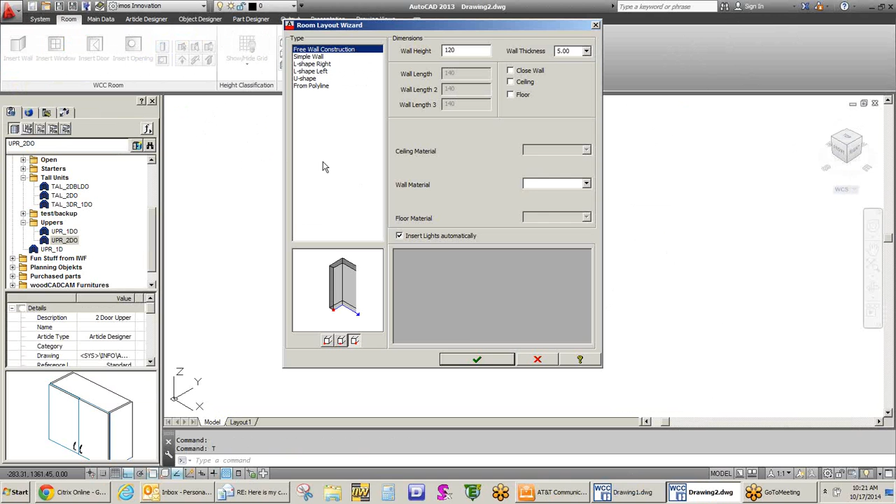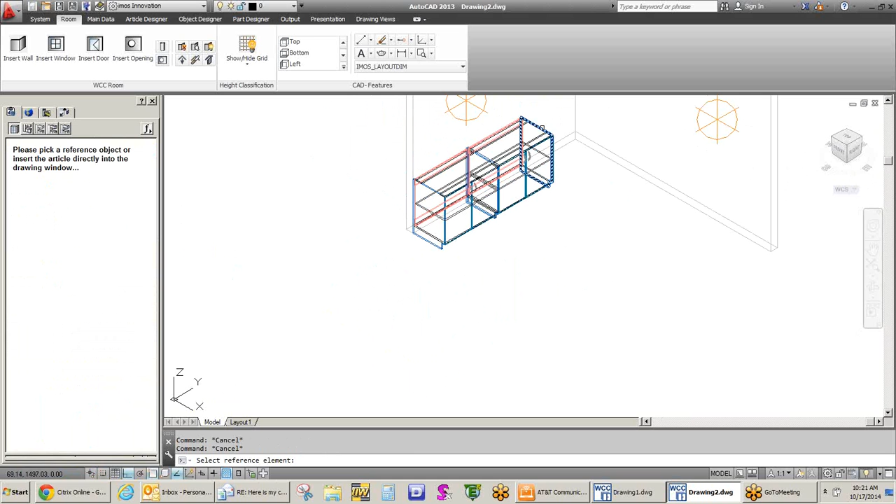So I'm just going to select, and type in whatever wall kind of stuff I want. I'll take this and select that I want to be able to place objects within the walls we've created. I'll do that a little faster than before, and throw in a tall cabinet, and let's throw in an upper as well. So real quickly, you're able to place objects from the library, controlling height, width, depth, all those kinds of things.

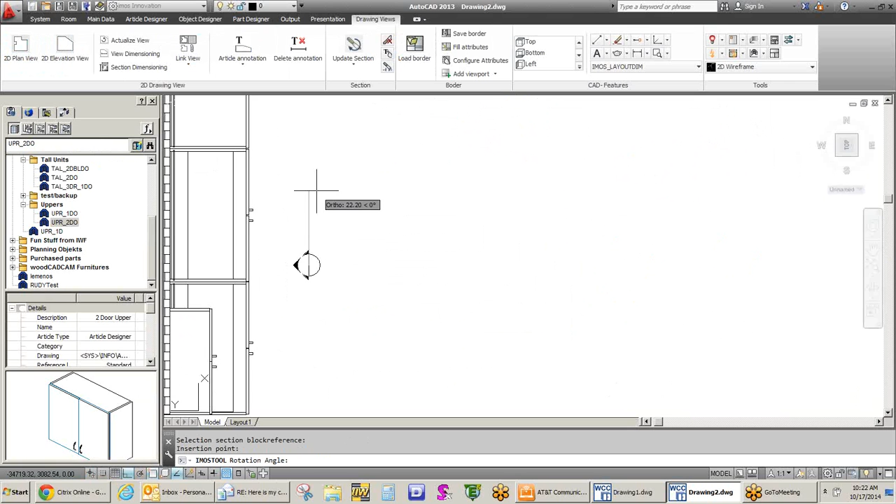Once we have that room layout done, we're literally able to utilize the tools for submittal purposes that automate AutoCAD, so we can get plans, elevations, details, and other things we might want. I'll label this as well, and tell it we want to create sectional information. I'll slice this from here to here, and we'll look at it from this side. I'll label this A, and now we have sections. Let's update this section and include the 3D wall elements of this. So now we have that within our sections as well.

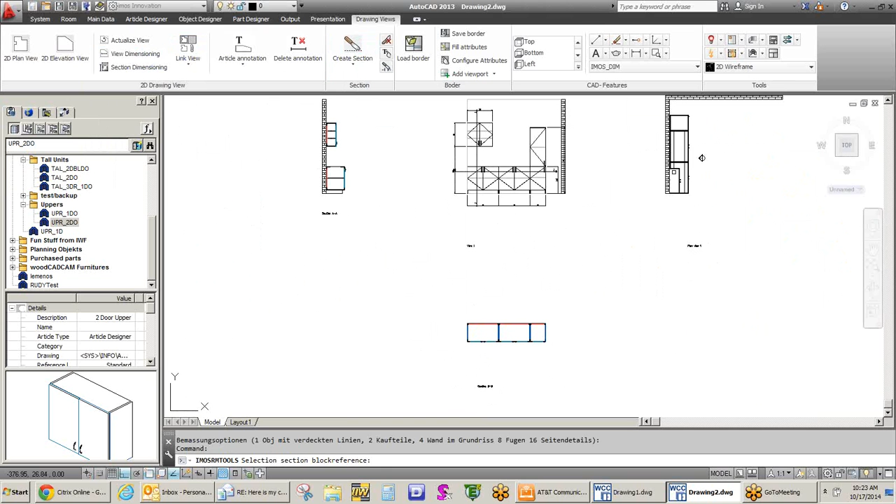Maybe we even want to create plan sections from this, so I'll slice across here looking at it from above. I'll label that B, and we'll place and label it. Maybe we want to automate dimensioning across this as well, even within our sections. Maybe we want to annotate articles and define what the product numbers and those kinds of things would be.

I'll tell this to add the position numbers in. Maybe I want to even annotate, in this case throw in and tell it what my adjustable shelves and these kinds of things might be. And so that's done as well.

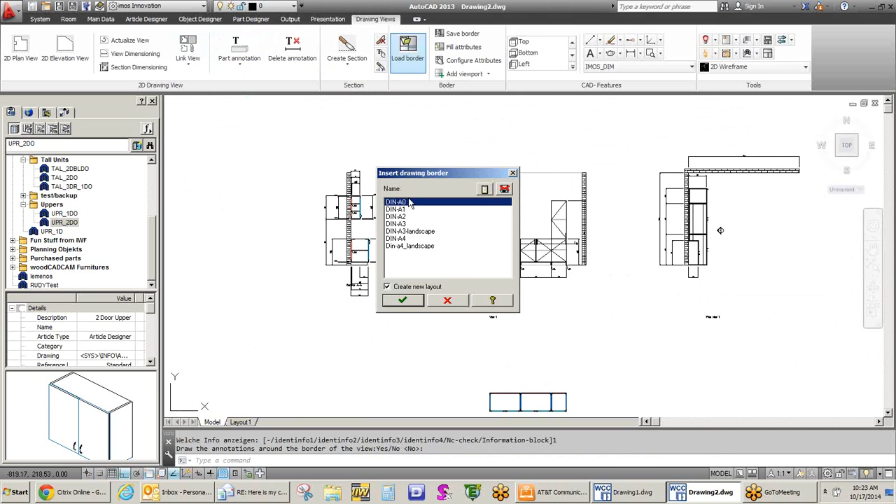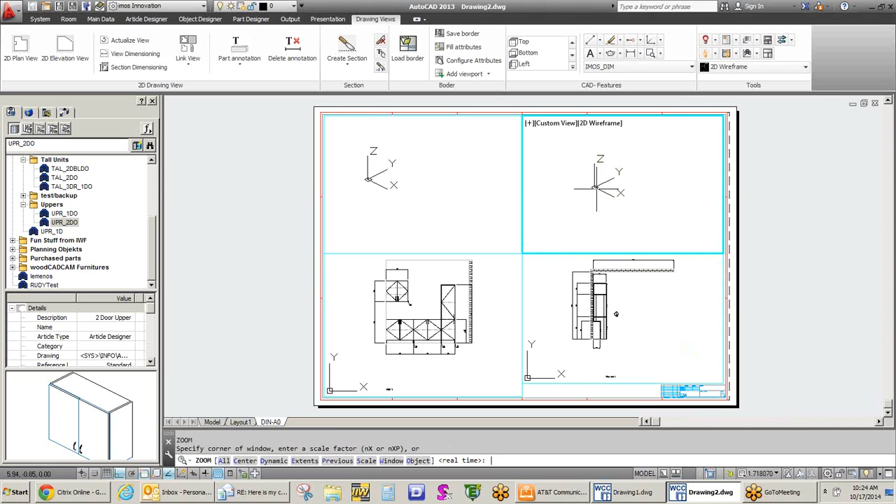So the next stage would be to quickly utilize tools to load borders and those kinds of things, so I could work within any viewports we might have and link the views. We'll say we want to throw an elevation here. I'll tell this what I want, and maybe link this view so we can have the plan view. In this case, maybe I want just the 3D, and change the visual styles or performance within that.

So of course that could be done. In this case, I'll just tell this that I want it to be shaded or realistic, whatever you want to work with. And again, maybe we want to come into this and have some kind of sectional drawings. So the point is that you can work in 3D AutoCAD, get all the visuals, and it will automatically automate the processes for being able to get the 2D shop drawings and architectural submittal style stuff done as well.

Does that make sense? Yeah. Yep. I'm sorry, I didn't hear anything from you guys' end. Yeah, yep, that makes sense. They said yes, it makes sense.

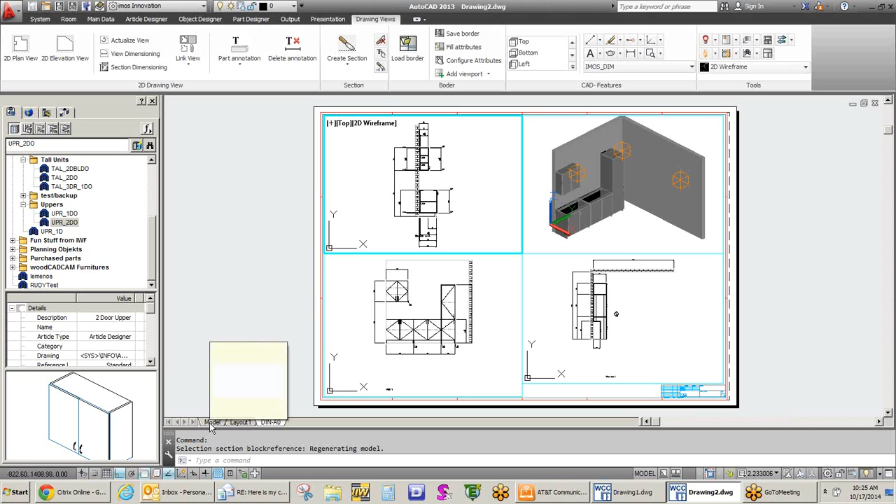Super, awesome. That's just a real quick understanding of being able to lay out walls, place products, whether they came from the library or new creations, whatever it is, and to begin to automate the process of being able to get drawings and stuff out of it.

Where I really wanted to go with you guys is the understanding that we might need to be able to create some custom things. So I'd like to start out kind of basic and then move into a little bit more custom things as we move along. Sometimes we're going to have situations where we need to be able to create something completely from scratch.

I think of this working much like you would in the world of modeling. Here I just have a cube I'm going to work with. I'll define a height, in this case a width, and in this case a depth. Let's take a number like 23.5, something like that. So now what I have is basically a cube that I'm going to work from.

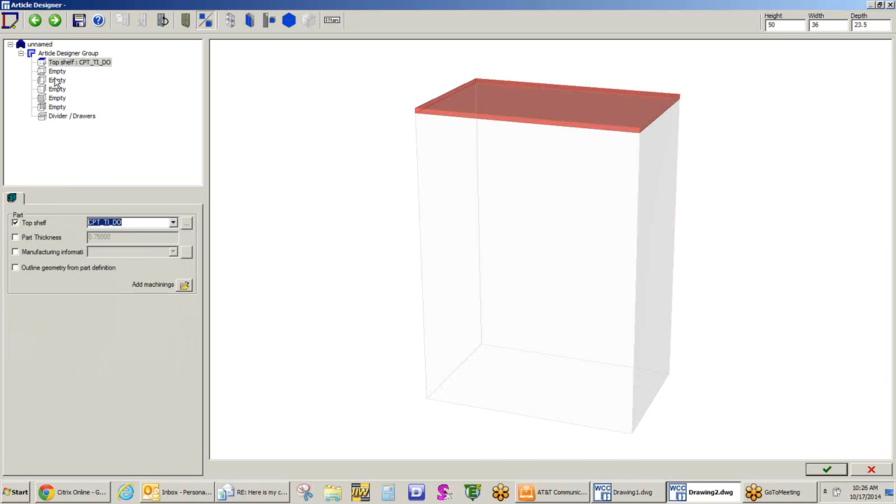If you'll notice on the left-hand side, it's the article designer group, and you'll notice it has all of these faces. I want to be able to apply things to these faces for a moment. In this case, I've got different types of tops and stuff that I might want to be working with. I'll tell this that I want a bottom, a left, or right. I'll leave the front empty, and I'll apply it to the back.

Now I want to be able to divide this thing the way that I might want. In this case, I'm going to tell it that I want to define it with fixed shelves and how I might want to deal with that. Notice if I use something as simple as 1:1, it tells it that it wants to be centered within the object, no matter how the height or whatever changes, so it becomes easy to do that. Or I could define it in a specific way.

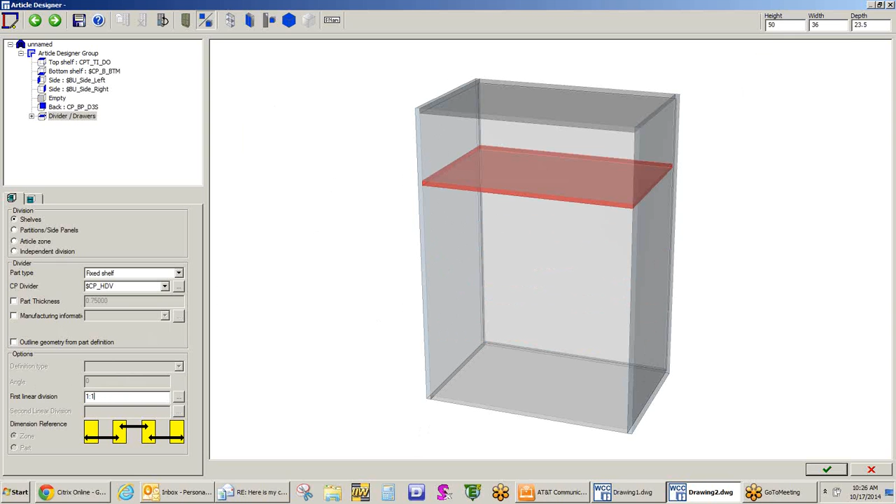In this case, I told it to be 6 to 12 inches from the bottom, so all the growth and stuff would occur above it. Or, of course, in reverse, I can work with it so it'd be fixed from the top. In this case, I'm going to just say I want to make this 1:1:1, and tell it that I want these to be equal no matter how it grows and works.

I can now work visually within this simply by clicking in an area. And in this case, let's just tell this that it's going to have some kind of sock drawers or whatever display kind of things that we might want within it.

I'll come into the next section and tell this that we want to divide this horizontally, so I'll tell it that I want to put a partition. I'll use that number now and tell it that I want it to be 12IN:1. I could click into this and use all of the faces that are created from these, telling this that I want maybe a left-hand swing on the door for this.

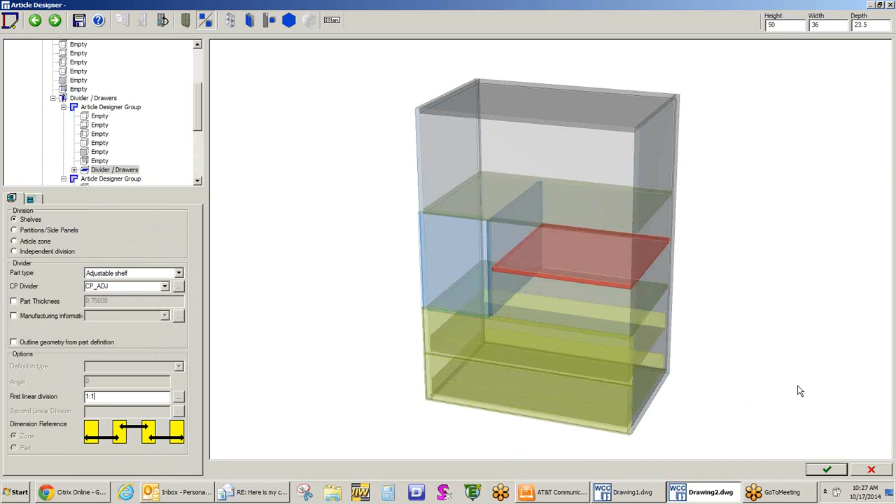I'll come into this area, tell it that I want to be able to have adjustable shelves into this, and I'll just tell it that I need one of them. Anyway, that's nothing real special, but just to see from absolutely nothing how you can build something.

What you might not know is that if I click yes to this, it could be saved back to my library, pick a category, give it a name, give it a description, and it's automatically available in the library. If I say no to this, it's available for me to create right within this project. And so if we look at this, we'll see that we have available.

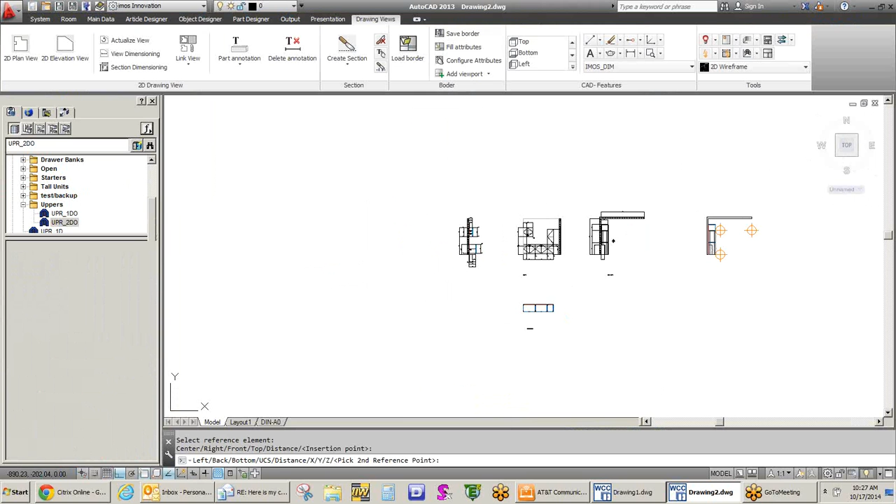I'm going to show you the way you might want to look at this information, and you'll see that all of the machining data and everything is completely available for you to view, including hardware and all that kind of stuff.

What you might also not know is that I designed this product literally while we were doing this, so that it was fully parametric. So, for example, if I said I want this to be 42 inches wide, that's what it's going to do.

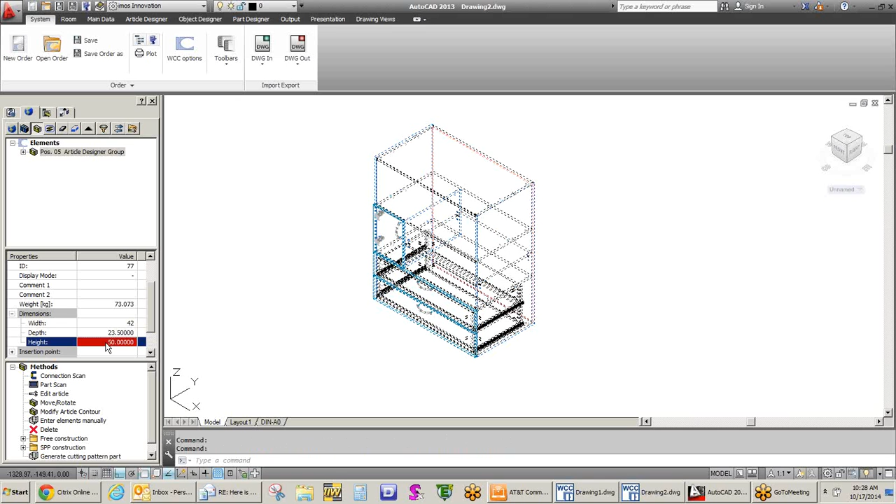This would probably be an easier visual one for you. If I came into this and said I want this to be 72 1/4, that is already done as well. I realize a lot of times you guys are dealing with unique as-built room conditions, so being able to have something you've engineered change in shape and size dynamically on the fly without a lot of work would be really important. Does that make sense?

I apologize if you guys are commenting or anything, I'm not hearing any of that.

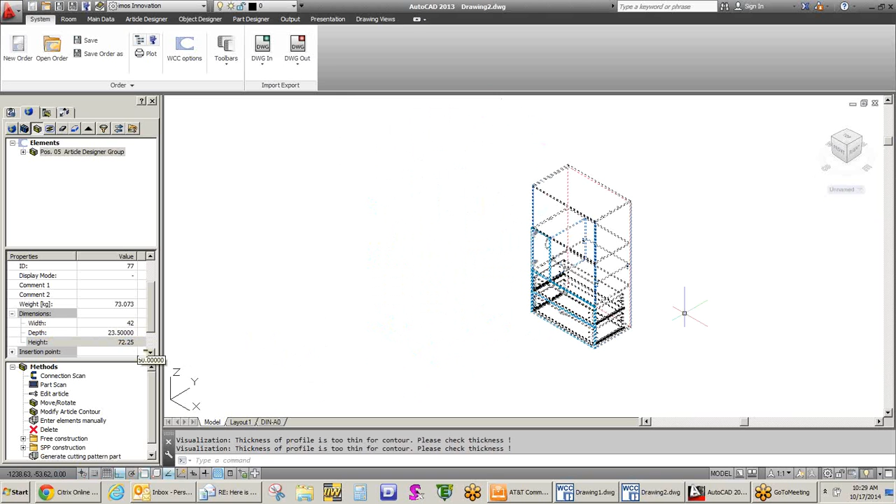Very, very good. Let's go a little bit further into this, understanding that while sometimes we deal with parts and pieces and sub-assemblies, often we might need to get into things that are a little bit more complex than simple boxes.

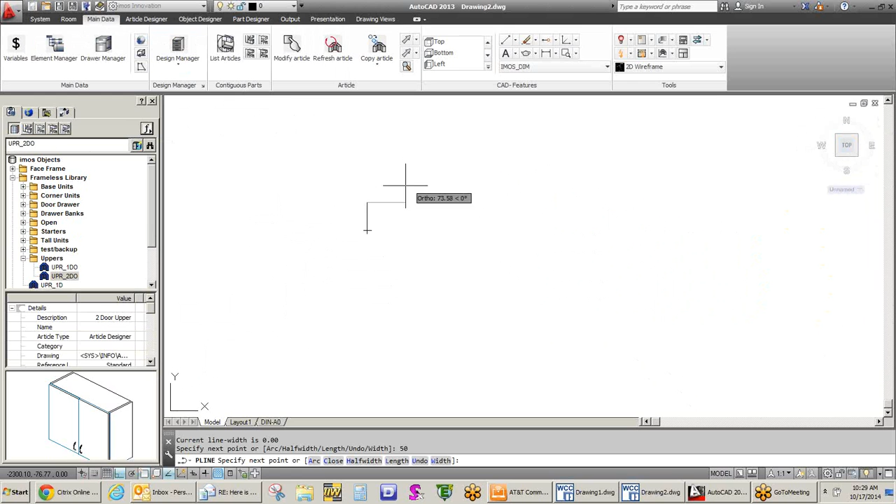So the next side of this I would think about getting into would be to work freehand in AutoCAD for a moment. I want to make something, let's call this 50 up that I want to work in. Let's come over here at like 18 inches, zip down at some specific angle, go into ortho mode, and get the polar tracking working. I want to turn this.

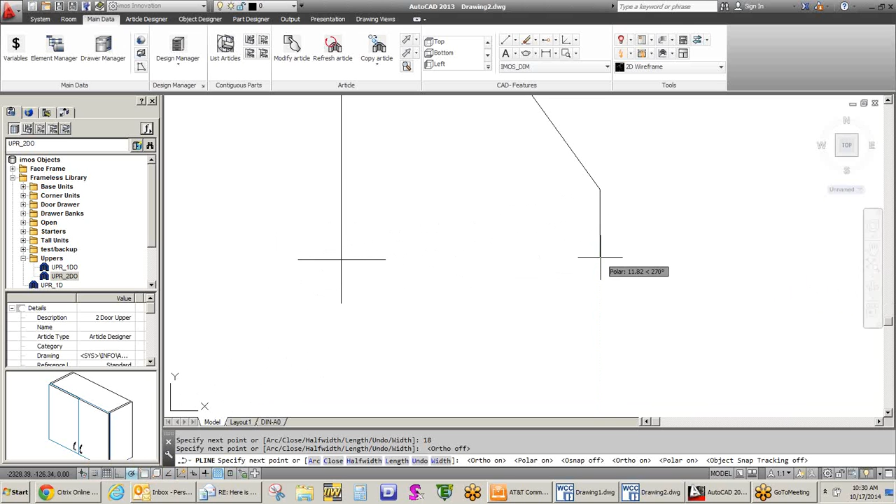Sorry, just a quick AutoCAD thing here. Come on, polar tracking, what are you not doing? Ortho, polar tracking, snap. Oh, I'm not sure what that is. I'll make this in a little bit different way since I'm too silly to get my AutoCAD working this morning.

By the way, that has nothing to do with WoodCADCAM. That was just trying to draw a closed polyline, which I normally can do, but for whatever reason, wow, I've got something going on with my keyboard.

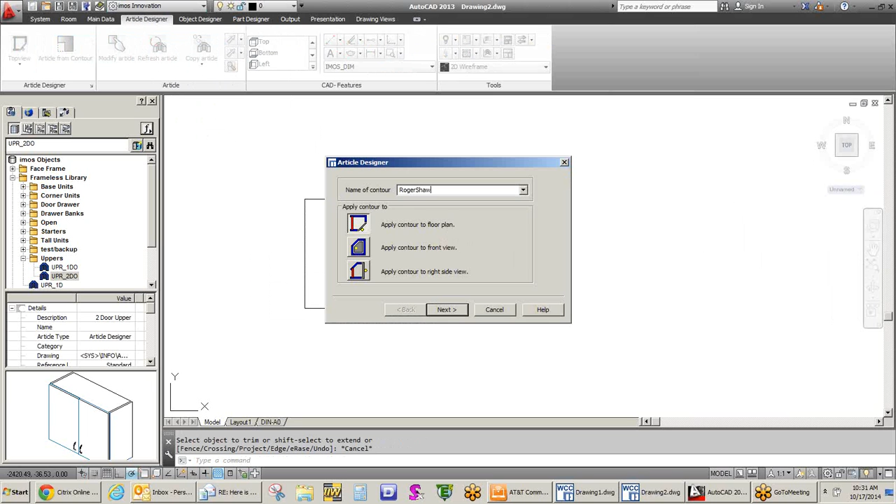Okay, so now, regardless of this, what we have is a closed polyline. One of the things I want you to see that you have the ability to do is we can also make a contour from this, I'll call it Roger Shaw one, and I can make this now an object from literally just a creation or view.

Sometimes we get drawings from people we work with, but it doesn't give us the full detailed information. It doesn't mean we can't use it. And so now I have all of these spaces available.

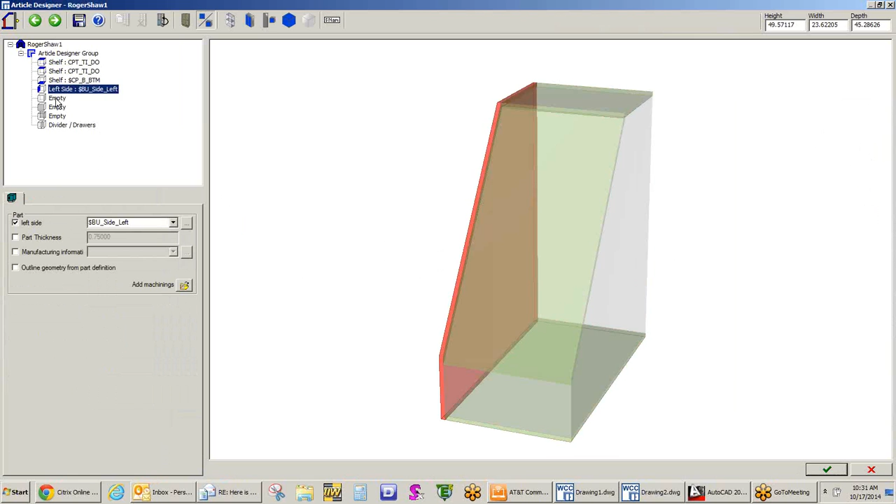So in this particular case, I'm going to tell this that I want to engineer up from this to begin to get details. And I'm going to tell it that I want it to be a door, with a right-hand swing for it.

So now, in this case, again, I'm going to say no to this just so I can get it within the project we're working on. But I want you to see that even workings like this give us a lot of ability to create things very fast on the fly. And again, even something designed from this kind of element still gives me the ability to work with it.

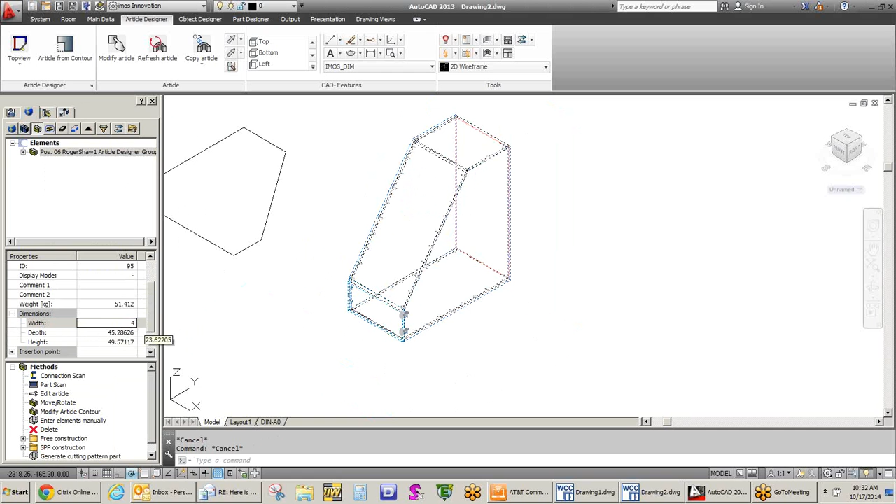So, for example, if we were working on this and said, for whatever reason, we need this to not have this kind of a width, but we want it to be 40 wide, and change the depth of it to 34, and increase or decrease the height, whatever it is you're doing, it gives you that ability very quickly to work with it.

One other thing that might be relevant for you guys to see is the kind of level and detail you can work at with the product created. Here was the one we were working on a minute ago. I could literally say I want to work all the way down to the edge level of this. I selected these two edges, and I want to change the construction methodology. I could make it a miter joint or whatever. It was what I call an inset joint, where the top was meeting into the side of the side panel.

In this case, just so you can see the intelligence of the product, I'm going to tell it to become an onset joint where the top is now over the end panel. So it got smaller, and this was extended. All the machining changed and all that kind of stuff.

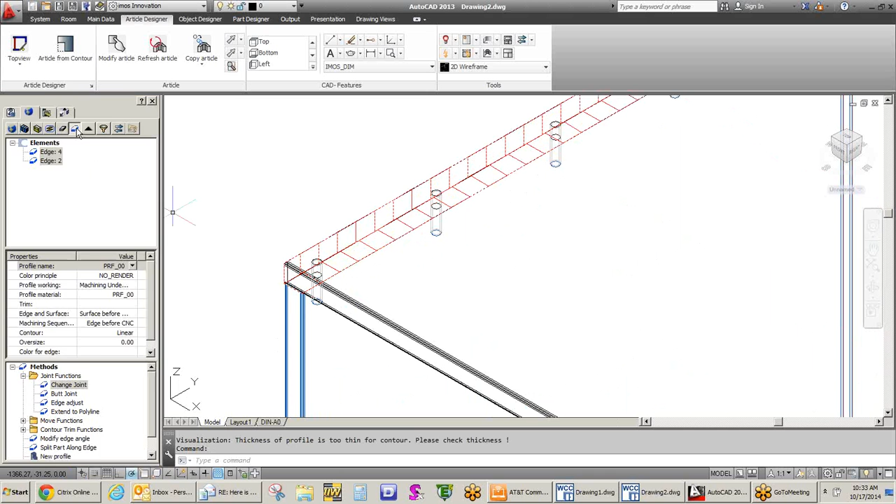Even further along, to show you the controls you'd have, I could say I want to move this edge and have a 2-inch overhang. As you see, there's a lot of controls to work with, plus other CAD features you could use.

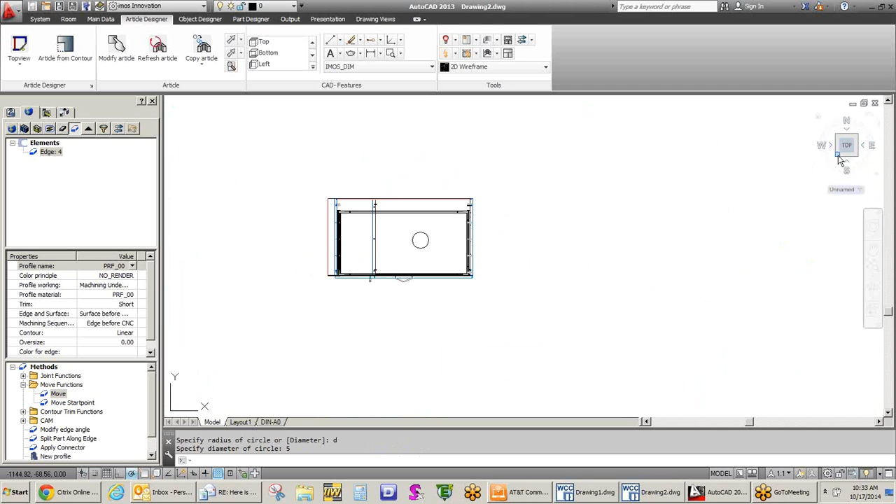I'll say in this case that I want to make a circle. I pick a spot that I want this, and I'll tell it I want a diameter of 5 inches. Maybe we've got some kind of pipe or a chase that we need to work on here, so I'll move this where you can see it.

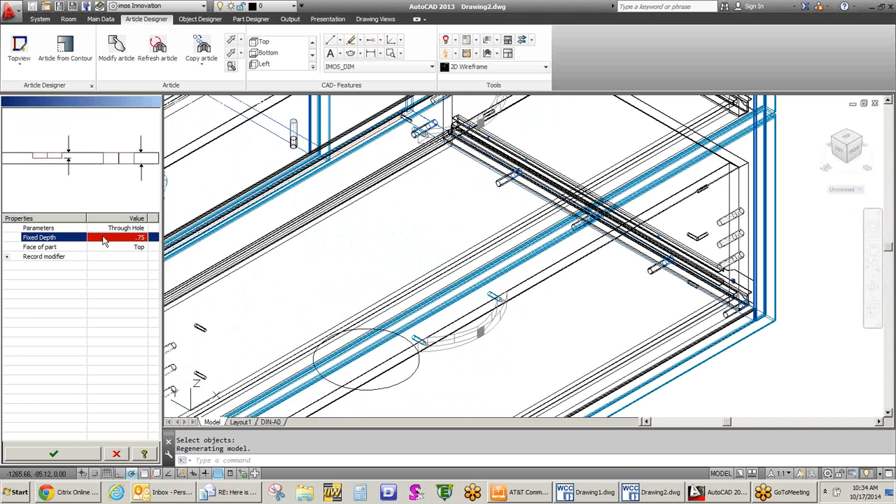In this particular case, I want to take this shelf, and this shelf, and this shelf—not worrying about the drawers for now, just as an example. I'm going to tell these that I want to transfer AutoCAD elements to them. Here's the AutoCAD element I created. I'll tell it the depth, the direction I want to cut through, those kinds of things. Literally with a click of a button, I've now added all the machining G-code ready for those conditions.

Hopefully we're following along and doing some okay stuff. I want to move into an area I think of as more free-form, where you can do additional things. I'm going to create a new Object Designer article, starting with basically nothing. Here I want to define the sectional information, the way I want to work with this product.

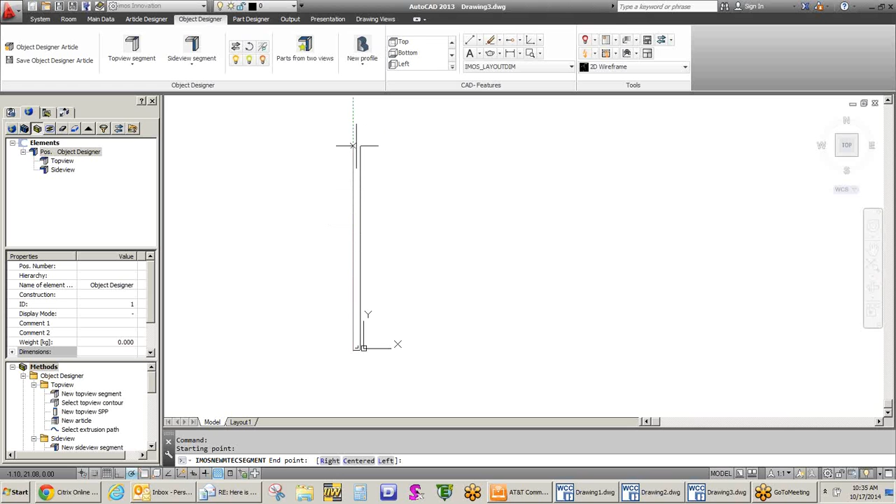I'm going to tell it that I want to begin by creating a side view segment. I'm selecting a material—in this case 3/4 inch MDF. I was thinking about creating an object that might be some form of a cash wrap or something like that.

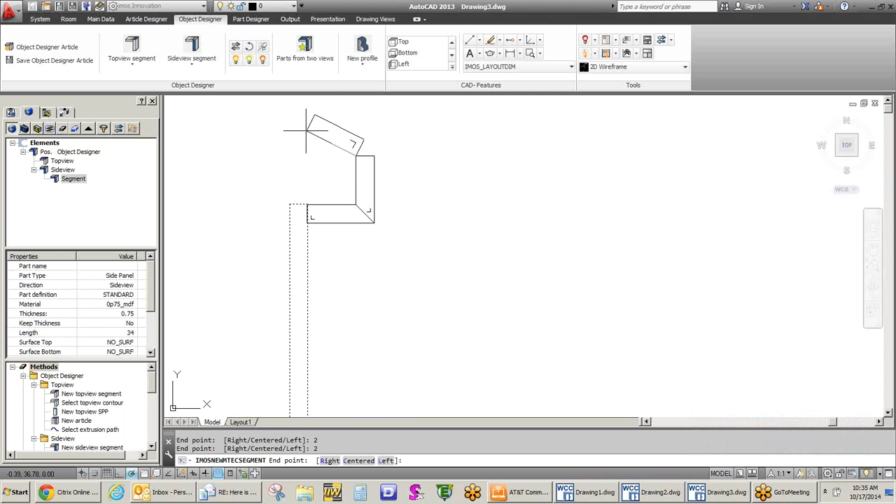I'm going to begin by designing the way I want the inside of this to work, and while not overly complex, I think it will show you some of the good features. I'm going to say I want to come up at 34 inches, and I can continue adding side view segments. I'm going to tell it I want to go in a couple inches, up a couple inches, and out a couple.

In this case I want to go 2.75 inches, and go from here up another 10 inches, adding some additional segments to this. Thinking about a side view segment here, I'm kind of thinking—where are you at? What do I not have happening?

Okay, I no longer have intersection points in AutoCAD. What did I possibly do to my AutoCAD?

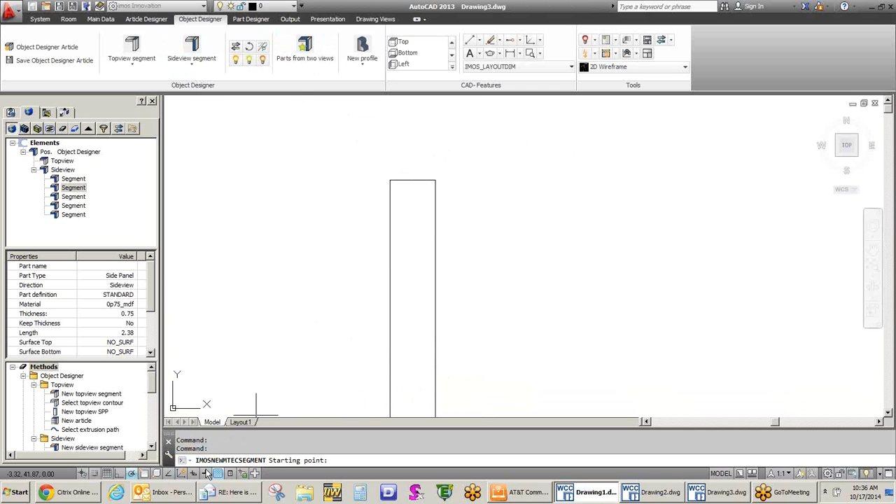One more second—object snap. Settings, okay, you say you're fine. You have to turn it on, I believe. Your object snap—yeah, I did, it's on. I don't know at this moment what to say. AutoCAD's a fabulous tool most of the time, but in this case it's behaving rather strange in that it won't let me. You have to push that on there to turn it on. One more over, I think, to the left. Yep, turn that on, press it. Now select what you want. I guess I turned that off a while ago, maybe—I don't know, I still don't see it doing anything. Hit escape and hit the command again. Nope.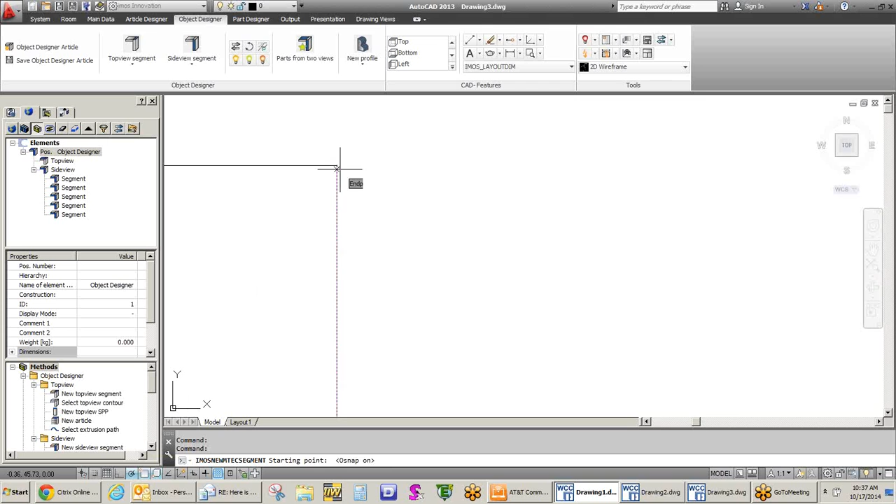There's something very, very strange. I've had GoToMeeting do some really wild stuff before. Okay, there we go. I thought I had it turned on, but anyway. So now we're back into this. Pretend like you didn't see that, okay?

I'm going to come down here at 20, and jump into this a couple of inches, and now maybe I want to come down at like 6 and back out. What I was thinking of there on the customer side is that I might want some kind of aluminum extrusion or some kind of display on the back side of this.

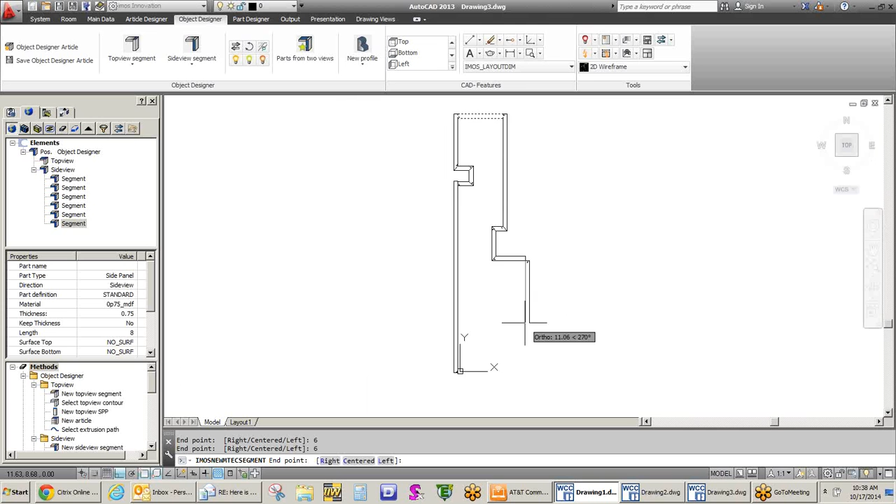I want to move into, in this case, what I might be dealing with a toe kick on the customer side, and I need to put this on this side of the line, and I'm going to tell this 4, and we'll come down here and finish this guy out to where this needs to be at 5.75. One more segment, and I'm going to make a segment across here.

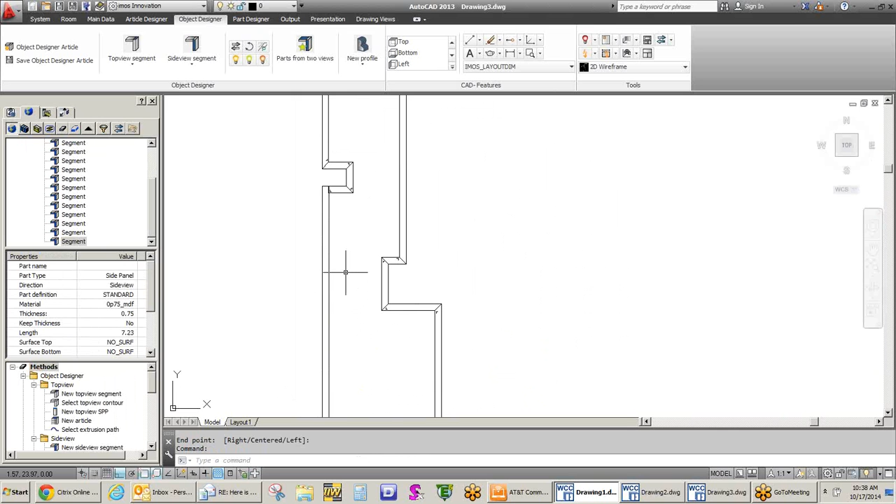So basically what I did, even though it's not pretty, is I made a side view section or profile of what I might want to be able to do.

In this case, I'm going to use the boundary command, and tell this that I want it to create a polyline object for me just so you can see this. I'll hide an element so that we can see our polyline. There might be things that I want to do with it.

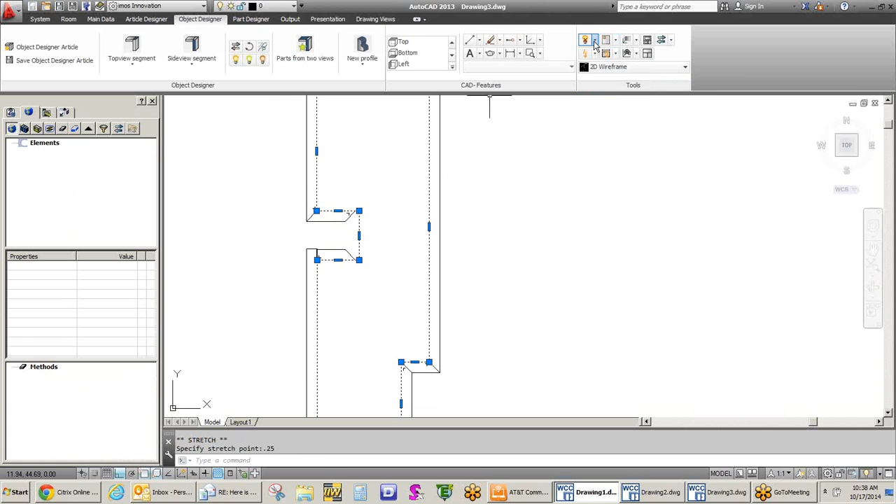For example, I want to be able to pull this in, say 1/4 of an inch, because if I'm going to route this or something, I don't want the radius of the bit to interfere with me being able to get square parts. I could do that throughout this.

The next thing I would want to do is create some kind of a top view design for how this might work, and also I'll use AutoCAD here to say I want to create a polyline.

Let's make this like 78 inches this way. Let's go like 80 inches this way. Let's tell this that we want this to finish out with an arc, and I'll select and a line.

Polyline. Roger's going to shoot me. Select second point. I have no S key. Got something going on. Arc. A. S. Select. Okay, this was the kind of object that I was going to try to get to.

Let me edit this real fast. Say we want to join this with this. Okay, so now we have a polyline that we could be working with.

Here, I'm going to tell this that I want to be able to create a top view section of this. I'm going to say that what I want to do is work from here, and I'm going to tell this that I want that to be 8.

I'm going to give this a little movement where I want to be placed because I had a 3/4 inch side panel that I wanted to work with. I'll array this and tell this that I want this to have a path.

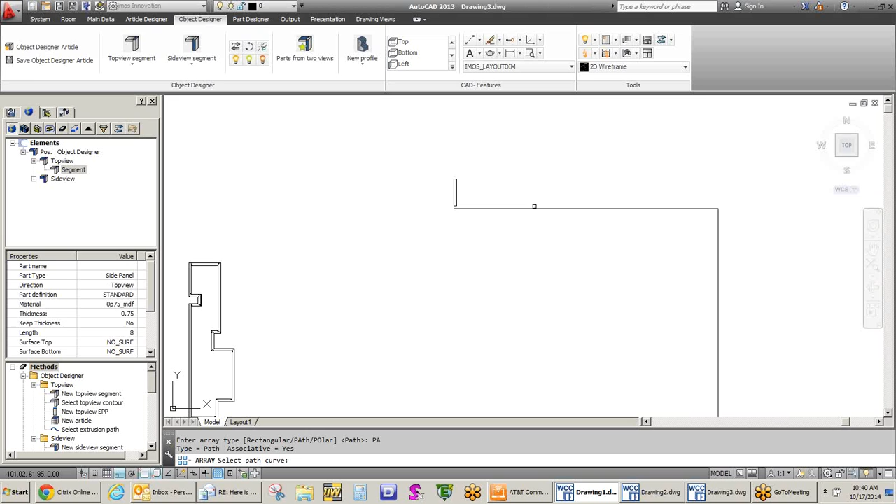I'll define for this the kind of ways that I want to work with it. I'll tell it on 16-inch centers, and I'll take this and explode it.

From here, I might want to do some additional things, like I want to copy this and be able to position it where I want. Maybe I want to also copy this.

Waiting for a save, just a second. Come on, save the file.

There we go. So now I can take this, and maybe I got some place that I want to double up the way that this—what I'll call studs, partitions—these kind of things might work with.

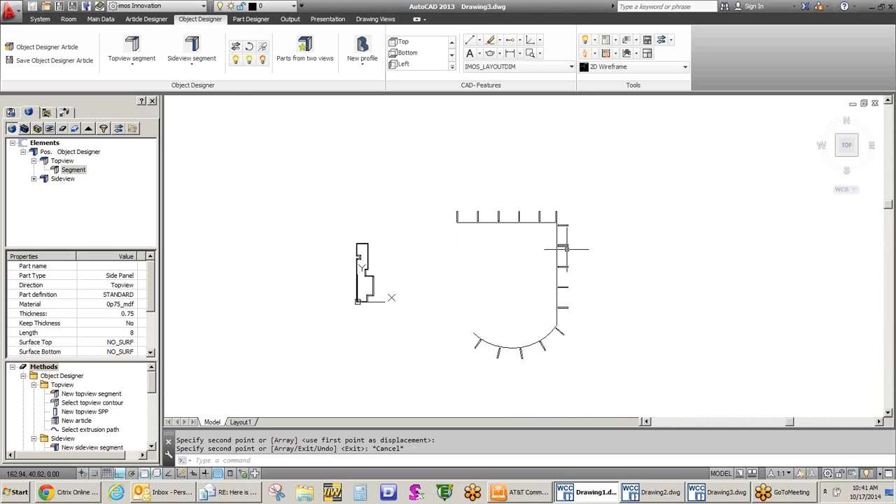From here I could say, hey, I want to make parts from 2 views, and in this case I'll literally say that I want to take all of these side view segments and apply this, so I'll say yes, I want to create all of these bits of information across this.

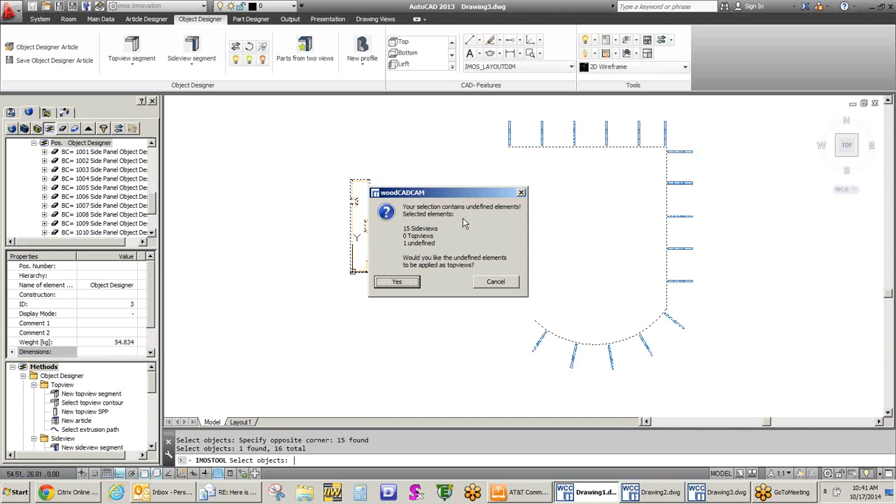And so now all of these have been made. I also want to be able to take this and say I want you to follow this shape. And so now we've created this, and I'll say that I want to be able to insert this.

So all the parts and pieces and everything are done, and of course manufacturing ready for this as well.

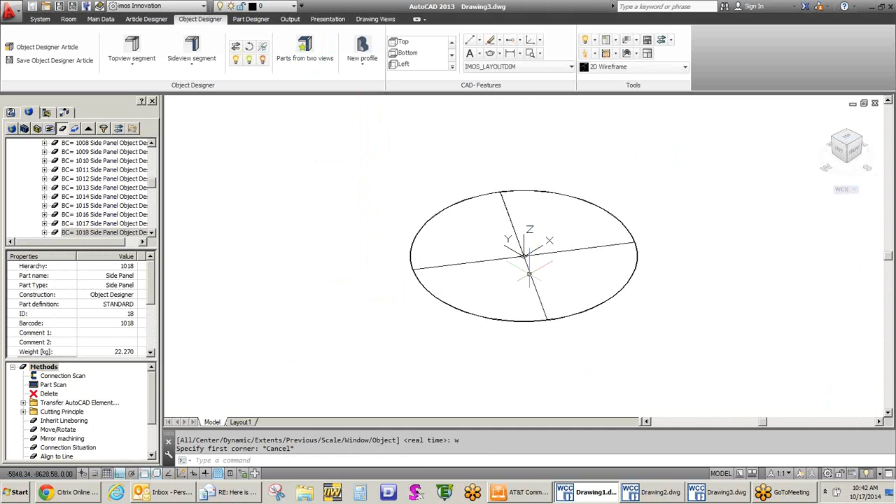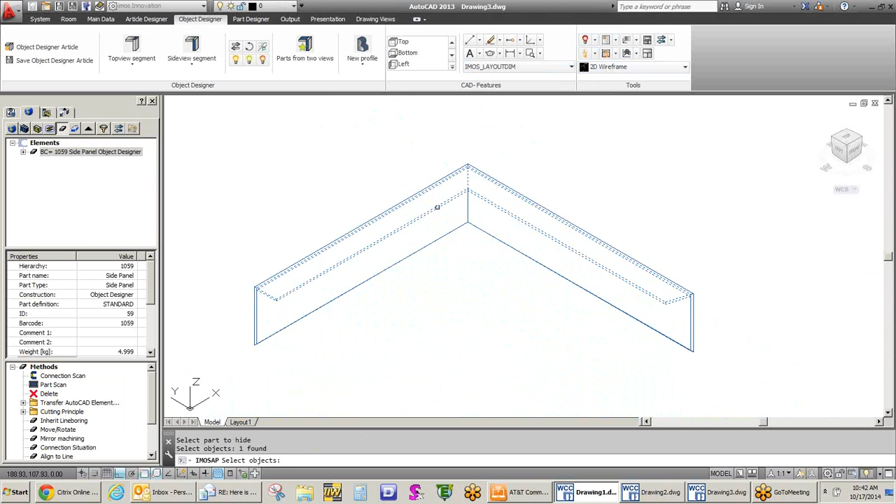I might want to take this and do some things. So for example, I want to isolate some elements. I want to work down to this, and I'll isolate this a little bit further. Maybe I don't like the way that these plates are automatically being broken up for construction kind of stuff. So I'll take these and tell this that I want to join this. Now it became one part.

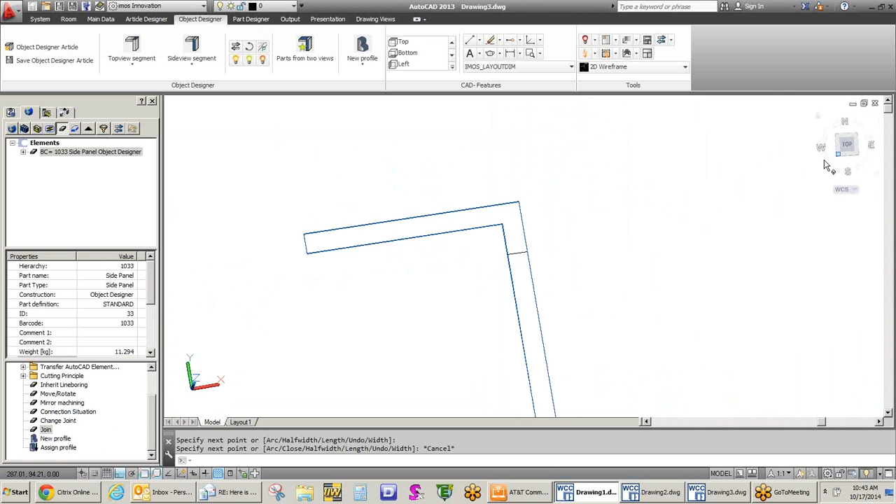I'll use AutoCAD here and be able to define. I'm not picking an exact point. Any kind of a polyline shape, straights, angles, whatever kind of funky lines you might want for this, you could be working with. And so that would allow me also to be able to work with this and create cutting principles to where I could do that with any kind of a known polyline shape. And so now I have...

Struggling today. Okay, I want to select this thing. I want to make a cutting principle. I want to do it with this polyline. I want to select the polyline. I want to be able to say OK to it.

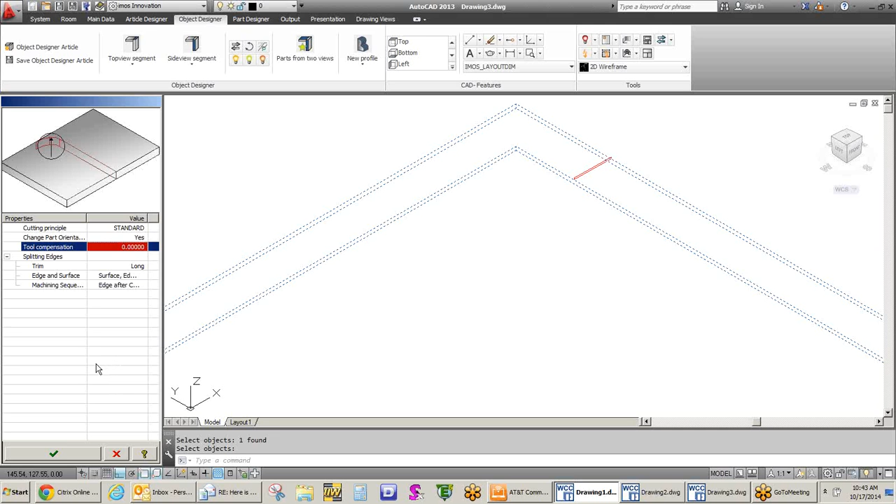Oh, for whatever reason, it had no depth. There it was, I just didn't even see that. I don't know how we cut that. Okay, you should say yes, go trim, long, boom. And now I have still one frickin' part.

Probably done this a million times, and it's worked absolutely perfect. The only thing I can think of is that when I made this polyline, I did something really whack that it's not recognizing what it's getting.

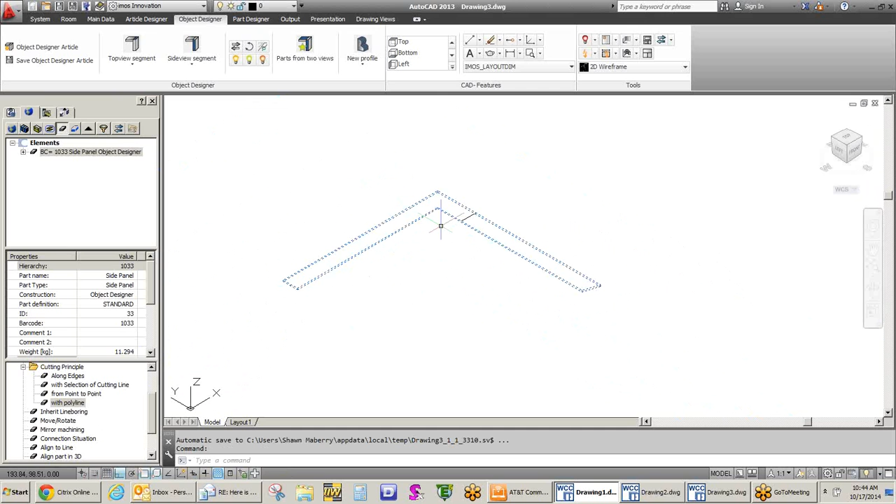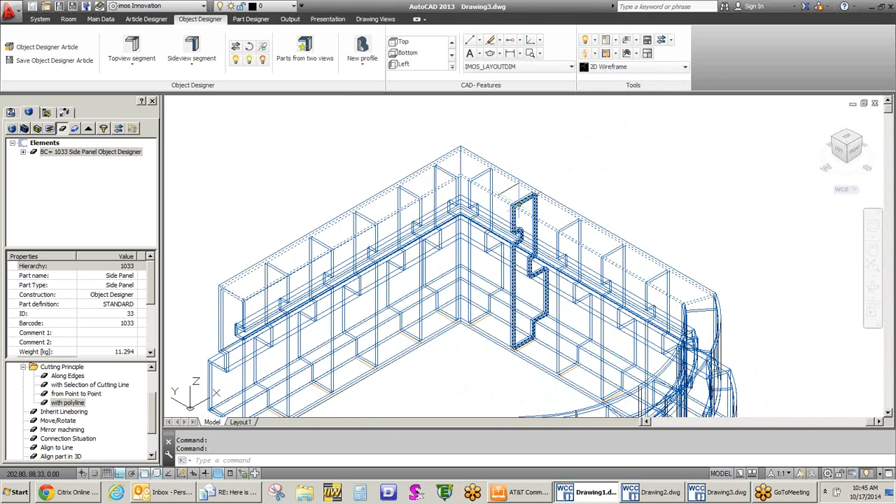This guy, I want to make this kind of a cutting principle with this. Roger, I'm sorry, I don't know what I've done or what's going on with it, but anyway, the point I was trying to make is that you can control every individual break, whether it was skins, whether it's plates, whatever it was, so that it would be manufactured the way you want. I have no idea what it is, but what this would have done is then segmented these two parts out so that they would have been positioned the way that I wanted them. And so you can kind of see from this that I would have probably, if I was engineering it, done it here where I was doubling up studs and all those kind of things.

But whether it is a cabinet, whether it's something that you create from your own AutoCAD design of shape or those kind of things, it gives you a huge amount of tools to be able to build certainly things way more than boxes. So I'll pause for a moment since I've kind of blown this a little bit and let you guys give me some feedback, questions, those kind of things.

So you just created a, just say that is going to be, say, a custom cash wrap in a Dolce & Gabbana store or whatever. Yep. And you just created it from scratch. You're going to continue building on this from scratch. Say now you got to add in metal trims, glass, doors, whatever, right? Yep, you might throw some cabinets in it, might have some countertops, might have additional machining, might have whatever.

Right, so you just, now what, and I missed maybe the first minute of when I walked in, but you started all that off of a shape that you made down there in orange. Yep, started from literally nothing. So I could have either started from some designated shape that you guys had, just so I could trace around it, to have the section of what panels would be applied, or from scratch.

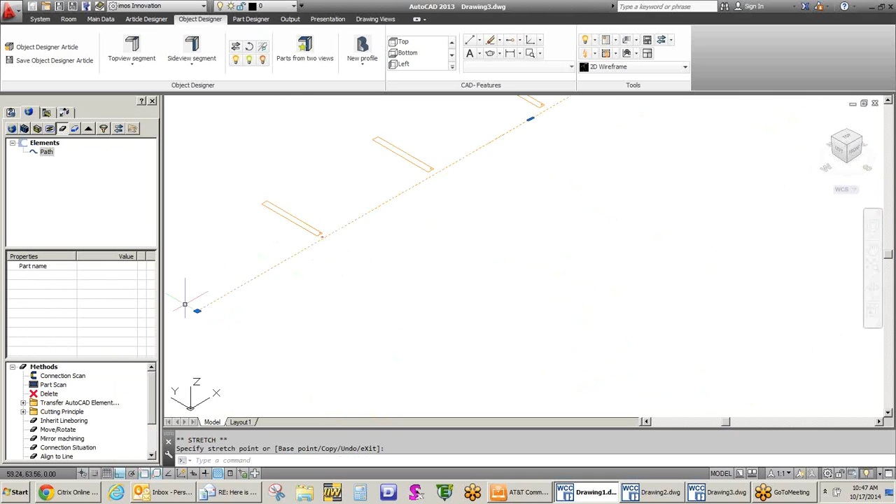So you don't really, now how am I going to say this now? How am I going to put this thought out there? So this whole idea of like this catalog isn't as restrictive as maybe initially you get the idea of. I mean, like combination of freeform and catalog. Because if you're my detailer, right, and I'm just like, here's this cash wrap, we've never done this before. So you're like, oh great, I got to make all these catalog parts. He just did it. Yeah.

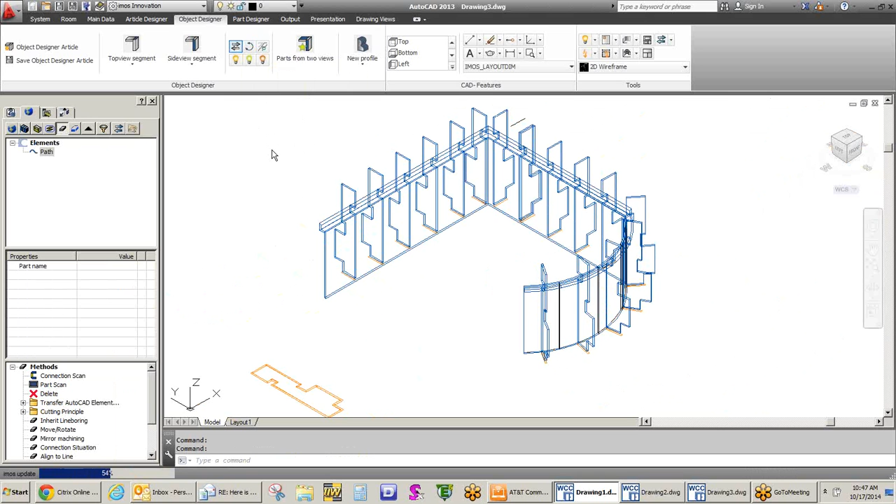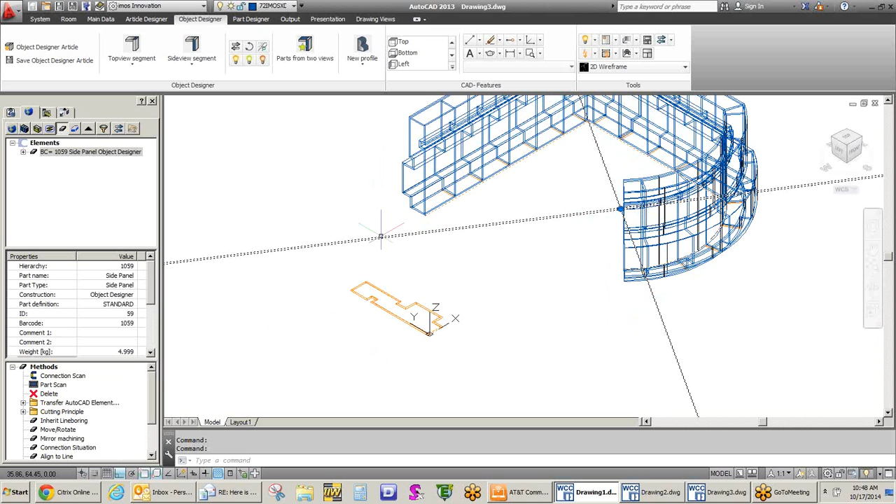But you would now catalog this. You could say it. Now, are you cataloging the entire assembly, or is it going to catalog all the sub-assemblies, meaning like once you're done, is it going to catalog the individual parts? So I can do two things for this. Number one, I could catalog the profile that I want to use. I could catalog the entire object, and if you saw what I did, I actually blew this away, re-grabbed the polyline for it, and even changed it parametrically.

So could you catalog this cash wrap and then say we get a project the next year, and you're like, holy crap, it's got very similar but yet different to that cash wrap we just did last year.

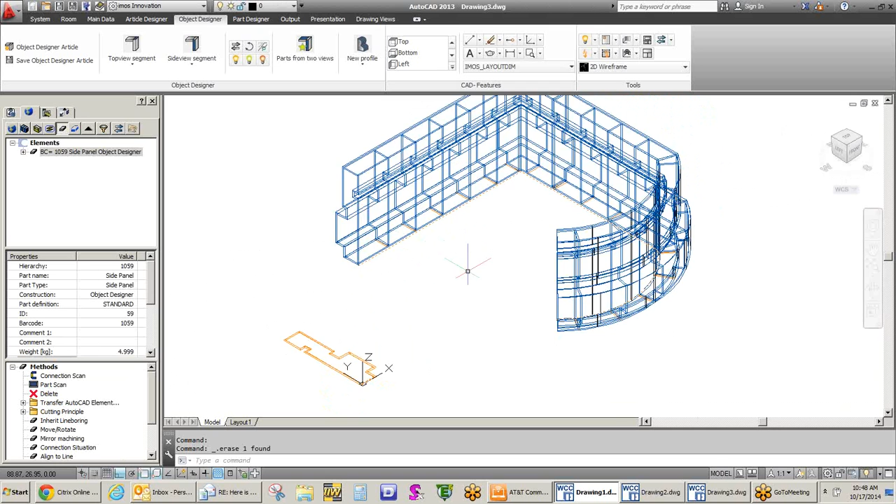Can you go and... I hand this off, and I'm like, it's almost just like the one we did. This is the famous project manager line - it's just like the one we did, right? But it's really not, like the shape or size.

The level of detail that our draftsmen are at is a totally different world than mine. So I say that, and they're like, yeah, okay, you say that. But he can utilize parts and pieces. So can he go get this assembly and say, I'm just going to start grocery shopping from this thing, essentially - like, I want that, I want that, I want that. And then now he's back to free form by utilizing pre-done parts.

Is that doable? Absolutely. That's the concept of this - there would be multiple things you could have. Number one, if you create section profiles of what it is you might want to do, you can catalog those, and then you could draw any kind of polyline shape you want, and it would follow along, just like I did in this example.

Or you could catalog this entire object, and then if you saw what I was doing, I literally would have the ability still to work with this and say, hey, you know what, this one's a little bit different, it's actually this long. And as a matter of just clicking a button now, that entire object is growing and changing to meet the new polyline features.

I'm just trying to think. I'm still starting to process different thoughts as you continue on here.

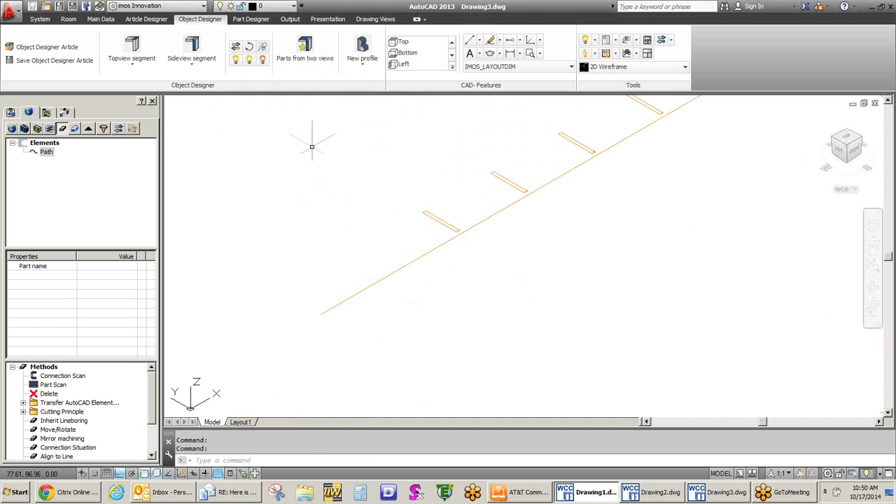And, you know, clients like to do weird things. Like, yes, that's the same one, or that's the same room, but it's getting bigger, but we don't want it to change proportionately. We only want this part of that wall to grow, but we want a certain component to stay the same. Like, you know, they only want - so if you made the change, like say, okay, the wall got bigger, boom, it's going to automatically update. But then how do you go back to say, well, they want the drawers to run through, but they don't want that upper niche to change.

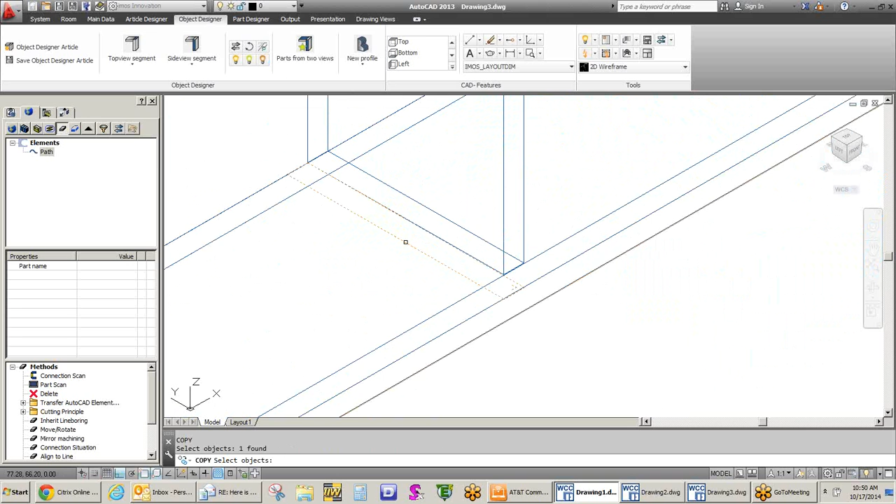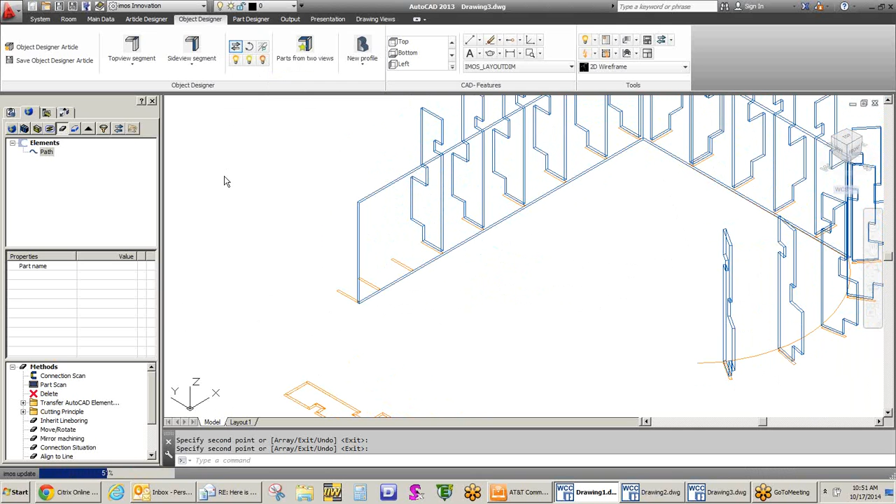So does it automatically make the change, and then now you got to go back and say, okay, yes, thank you for making the change throughout for me, but I want to modify that a little bit more where I don't really want everything to move proportionately. Does that work? I mean, you're in control - it's an engineering tool. It gives you ways to automate lots and lots of things, but at the same time, it gives you tools within it to do the actual real engineering kind of things you're gonna have to deal with.

So let's say 4 feet gets added on. There's like a drawer bank, 4 drawers in a base, and then next to it, what you added on, they want that as doors with shelves in it for storage.

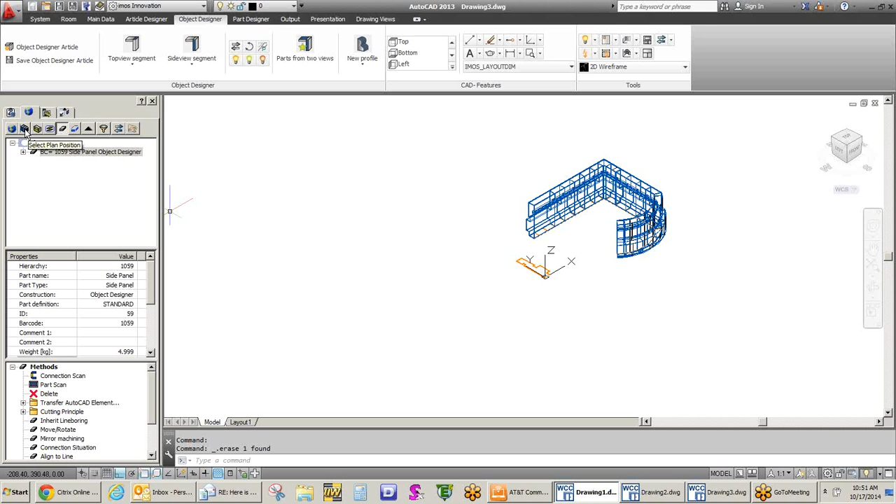Yeah, let me show you this way - I think this is going to make more sense, because that was just some of the objects. Here's what I want to get to. I want to come over here now, and I want to be able to say, I want to create this, and what I'm going to say is I want to make a bank of something. So I'm just going to say I've got 120 inches, and I'll tell this I want it to be 34.5, and I want this to be at 120 inches, and I want this to be at 23.5.

You have to give me a minute, because I'm going to work in something that's probably going to seem a little bit wild for a moment. Now I want to create, and I want to deal with dividing this thing up in such a way that 1:1:1:1, and boom - and so now I've created virtual elements into this.

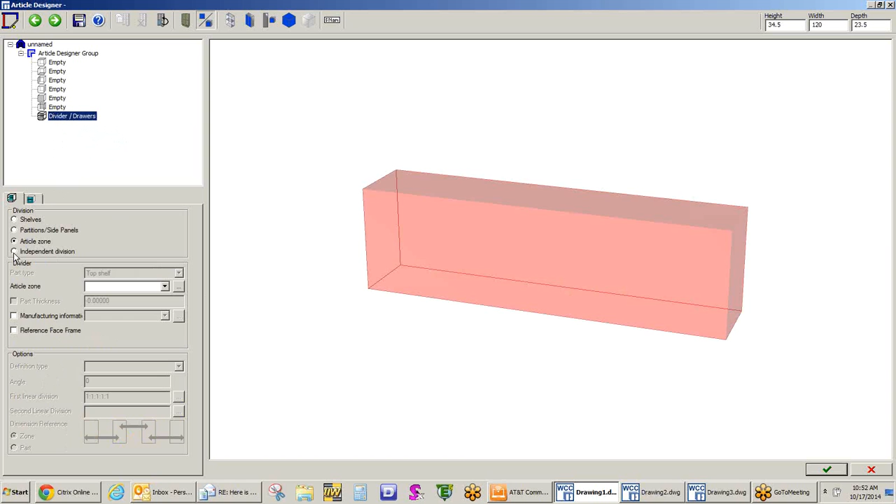I'm going to say that I want to get to this. Give me just a second, because I'm going to play with something here that I think will be really cool as we move across. So, boom, boom, okay, so now we have this.

And so now what I'm going to do is, once I've divided this thing up, I'm going to work within this, and I'm going to call this an article zone, and I'm going to tell this that I want to put this object in here. Let me get it built for a moment, and then I think it will make some sense.

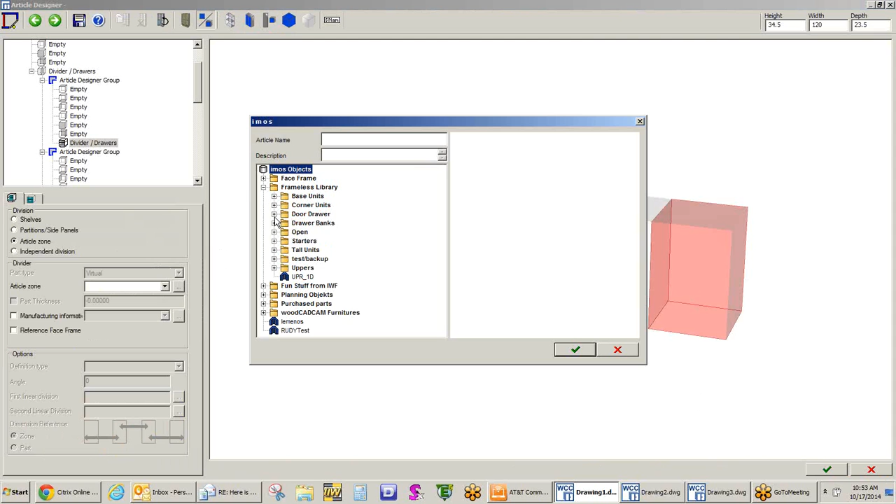I'm going to put a 3 drawer in this, and I'm going to leave this one blank, so it's empty. Maybe something else goes in it. I'll come here and say I want this one to be a one door, and I'm going to search my catalog for what I want to put in it - article zone - and select across here, so anything from your catalog. I'm going to put a two-door, one-drawer unit in this backside.

I don't need to save it to my library, but now I've got something I could be working with, like a bank of products. So now you'll see that was done, and I've got these things I could be working with.

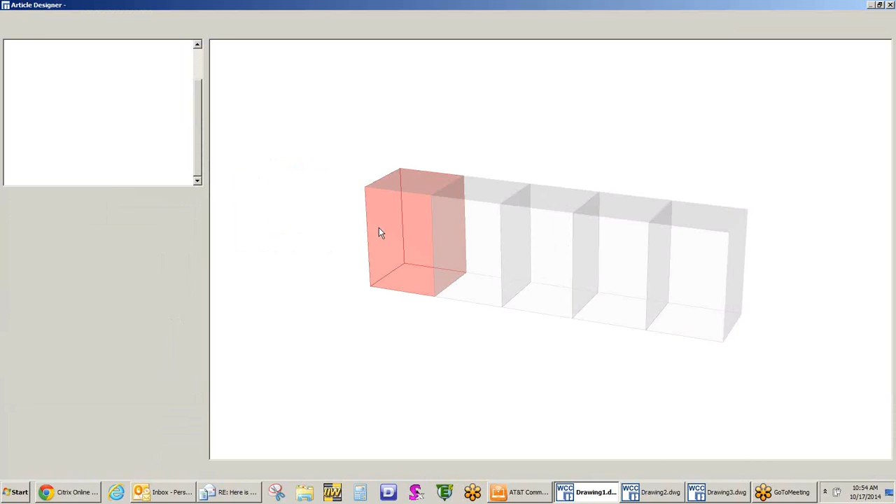If I wanted, at this stage, I could say I want to modify this, and I can modify it at the top level. So here I could say I want the width of this to become 96 inches. Now you'll see that was done - I won't save it in this case, but that changed, within a click, all my spacing and stuff for this.

Or I could even work within this to modify and say I want to work down at just the level of this particular one and do something with it. So yes, I can give you controls to make and modify and do whatever you want at a lot of different levels.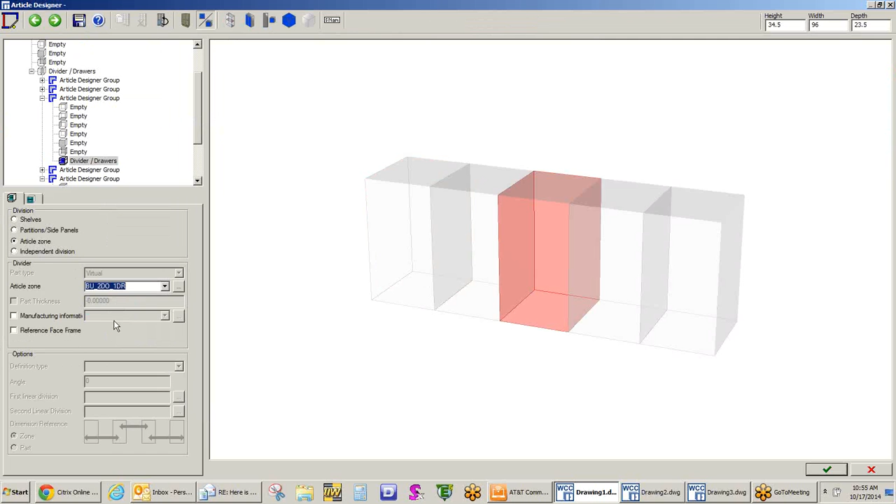By the way, if I were working with this, I could - sorry, clicking buttons when you don't know what you're doing - I want to work at this level, and in this particular design, I actually do want to be able to add something to it. So it is now in there.

At the same time, I could go into my original divisions and say, I don't want it to work this way. I want the last one to be at 24 inches, a fixed number, even though I want the rest of that to float. And that's what it would become - you'll see that's been created as well.

That has to have a lot of application for you guys. Well, we got a lot of people. You mean setting up catalog data to teach everyone? Oh yeah, that's included in the digital. Oh, I have that too. Maybe that's later. We're gonna go - I have that same thing running through my head.

We can go over that later after Sean, I think. Yeah, I can talk about integration. How limited this time, but did you guys - and this is part of your presentation - excuse me, did you guys do a unit of ours?

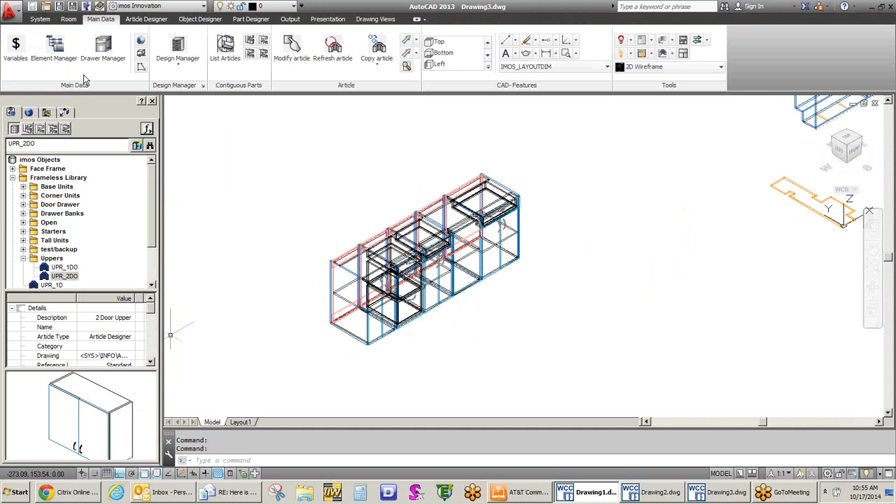Yeah, I had what I call an intern do it, and apparently there's a Goebel woodworking company in Wisconsin that he was thinking that's where I was, so it's kind of funny too. Last night, late, 6 hours away, he thought it was time for this. There was a little miscommunication, so I can call him, get him on the line, and have him show you that. I have a PDF of it. Okay, and all that - I can show you later.

Can we do it? Yeah, we can do it. I'm not worried about it. I am worried about how we properly integrate. Sure, I mean I'm seeing some things - both things. You're seeing advantages, I think you're seeing some points of like, well, how in the hell are we going to do that?

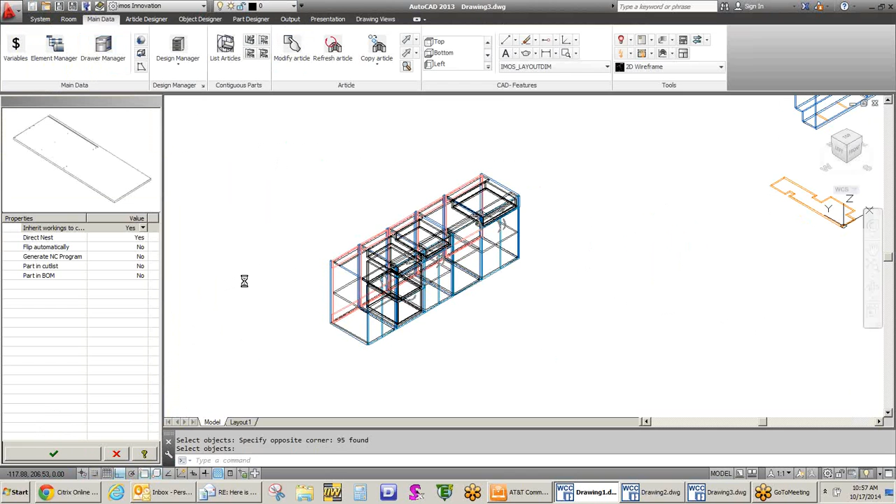What about - can you show us an example maybe of? I was thinking like a custom commodity integration. Maybe the same thing - you just make it and integrate it. Right? What are you showing, Sean?

We need to get into showing them the Cut Rite interface and all that. They just nested it out. Okay, so you just optimized it - that's right. Okay, the drawing, we got the 2D drawing from the 3D, and there's your optimal, there's your depth.

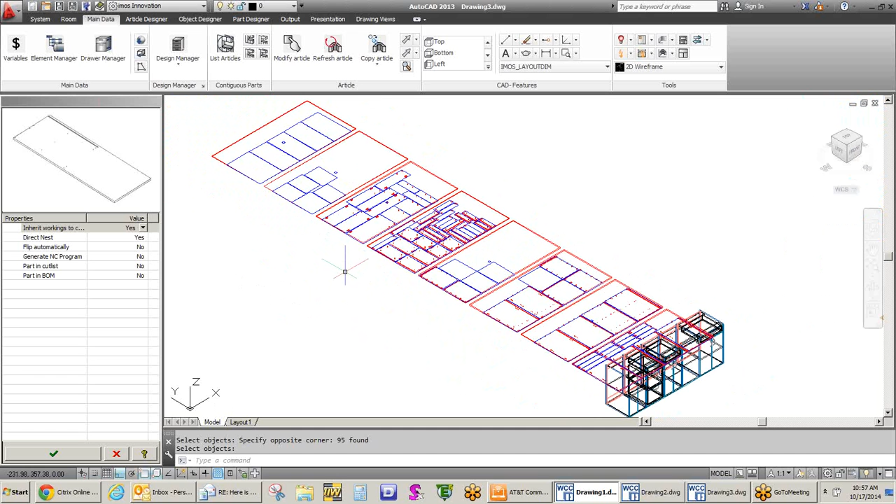Well, these guys have worked very closely together to get what we need in our market. But did you just optimize that while we had... You can do it in WoodCADCAM.

What we're doing a little differently, now we're shifting all the data over into Cut Rite. Do we need some of it to go to a saw and some of it to nesting?

Figure out how it's going to go, to the CNC or to the small point to point, or just saw. Did you say no nesting, we want to go to a saw? Whatever, that's all I'm doing is allowing you to sort the parts by destination. So whatever I want to send to the saw, I can. Whatever I want to send to point, I can. Whatever I want to send to nesting, I can.

We're under control here, so I'm just saying, do we want to see some of both? Do we want to see just optimization? Do we want to see just nesting? Do we want to see combinations of? A combination of nesting and panel saw.

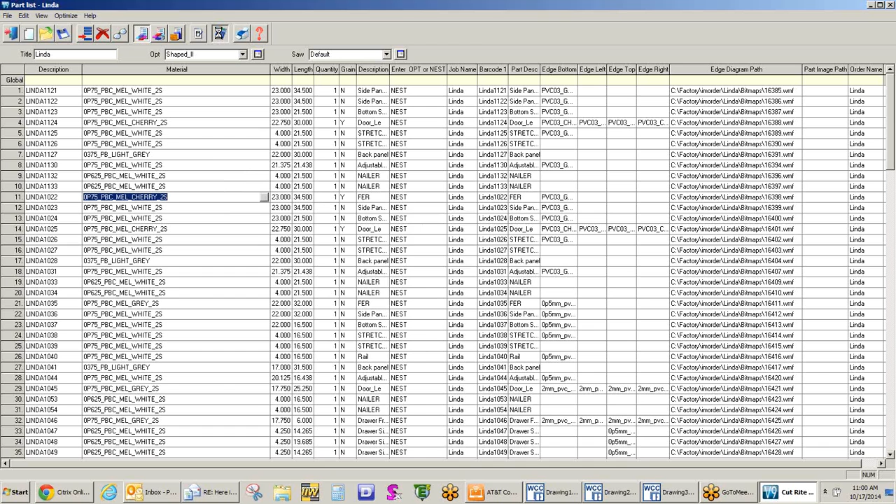So anyway, I just designated some of these that I wanted to go to nesting, some to optimization. I'm going to click the button and say, yep, I want to save it this way. I'm going to say that I want to do this so you'll see that we're going both directions.

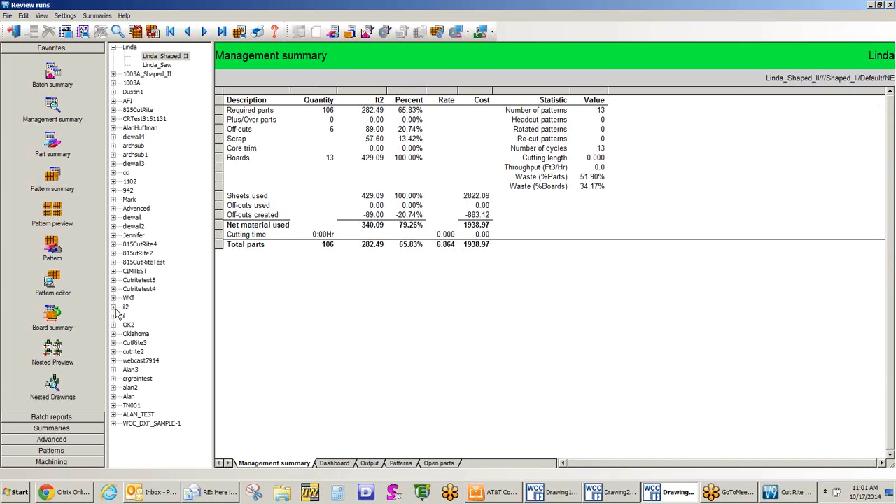And so now here would be my nesting results. We could look at all the reports and dashboards and details of those kind of things, or you could see the patterns that were created, laid out for a nest. Are we able to see that okay?

Yeah, good. And then, of course, I could work with an individual one, or even down to the level of editing and moving parts, all that kind of stuff. So that's available for you as well.

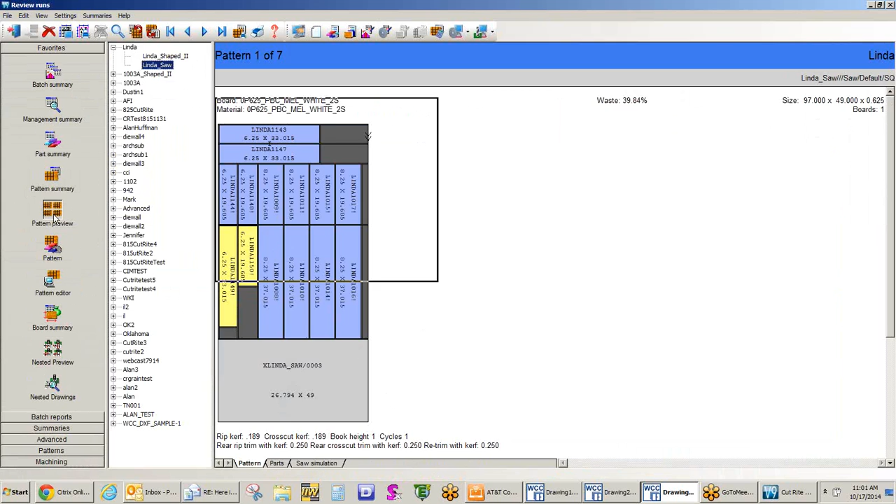I could also come to this and say I want to look at it from the saw side of things. So here is the patterns and previews of what's getting cut up at the saw. We automatically made your cut list, bills of material, including sheet stock, solid stock, hardware, buyouts, edge band, all that kind of stuff.

We automatically generated individual part G-code files for point-to-points. We automatically optimized the panel saws. We automatically generated nested files and G-code as well.

When you're doing freehand, you start from scratch.

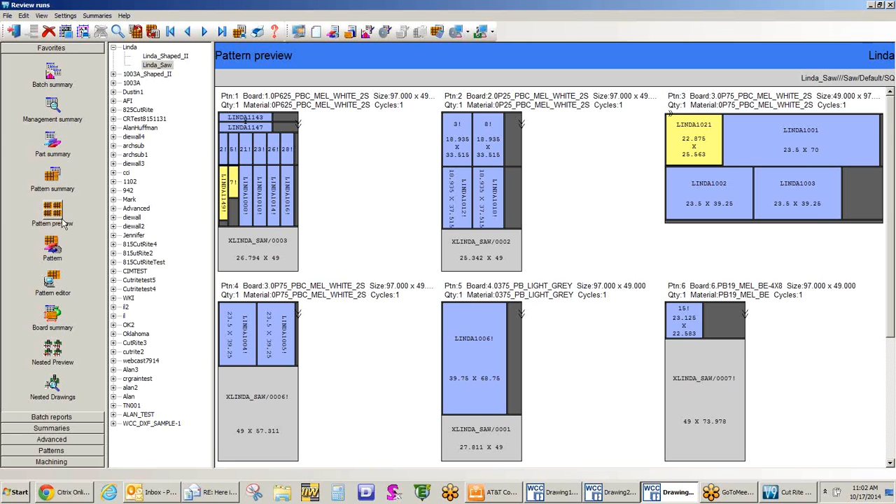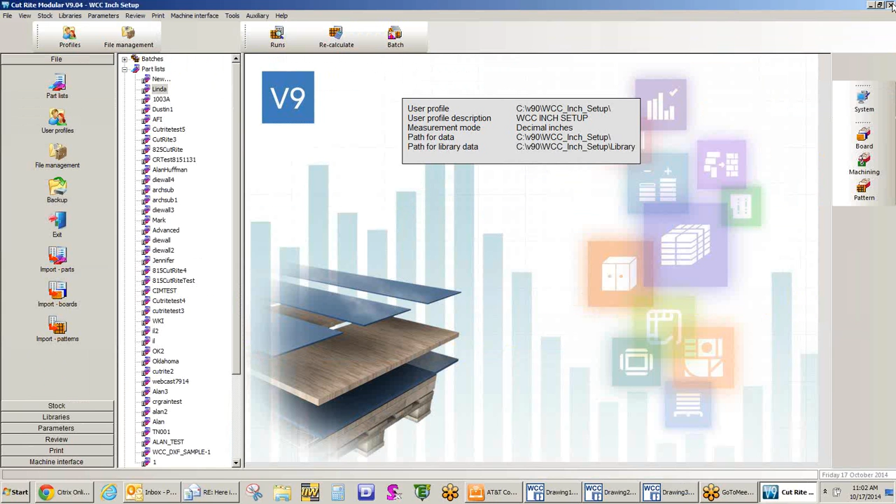How does it work? Like I have a unit, a cabinet or whatever you want to call it, that utilizes say 4 different types of finishes. So say there's like 3 different types of veneer, say you're using 2 different oaks which are different to get different finishes, ash and a lacquer on the same fixture. So when you're building that thing, how difficult is it for you to designate that?

So I just clicked on one part of this whole thing, and now I have the material that I'm using for this. I can select this and change any material. I can go out to my material libraries. So literally down to every single possible edge, you've got control to go pick and define what materials that you want to use.

So how does, if all of that is, well not always, if it's brand new, at the time of drawing is like when they're drafting it. Say it's a new finish, say it's a new teak finish, and we're still going through submittals of finish, how we're going to do it, what's the material going to be, and he's drawing it.

Yep, so if I want to add a new material, I give it some other name designation, whatever you want to call it, and I hit the save button, and now I have a new material. How do we link that?

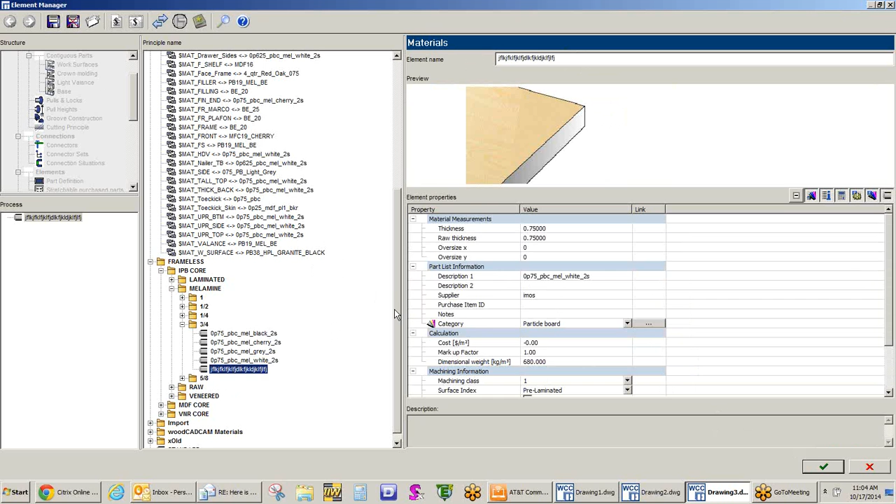How do we link that to our catalog? We create a variable, we create the materials, and then we've got a variable that's looking to what's being designated for that. So if we go back to the variables, here's our material settings, here's our case settings, the case parts - you'll see this is looking to a variable that is our standard, and at the order level we're able to select from whatever we just created or anything we want. It's really flexible to allow you to create new materials and assign those on the fly throughout the library, or at the individual article or product level, the part level, or the edge level.

So if you're putting a different color paint on an old panel on the edge, painting it a certain way - dark brown or whatever - basically we say paint to match such and such all the time on our edges. You're not going to call that out as an edge banding, but as a finish detail, a type of paint, a color that an edge gets.

Is that something you can assign in here like you would an edge banding? I honestly don't know the answer to that. I'm assuming it would be a zero thickness profile - yes, that's how I'd approach it, but in all honesty, since working with WoodCADCAM that's never come up as a question, so I'm sure they know how to accommodate it, but I don't know how to show you the way I would do it. My best guess is I'd turn that into a zero thickness profile edging, with a special designation so we'd at least know there was paint required for it.